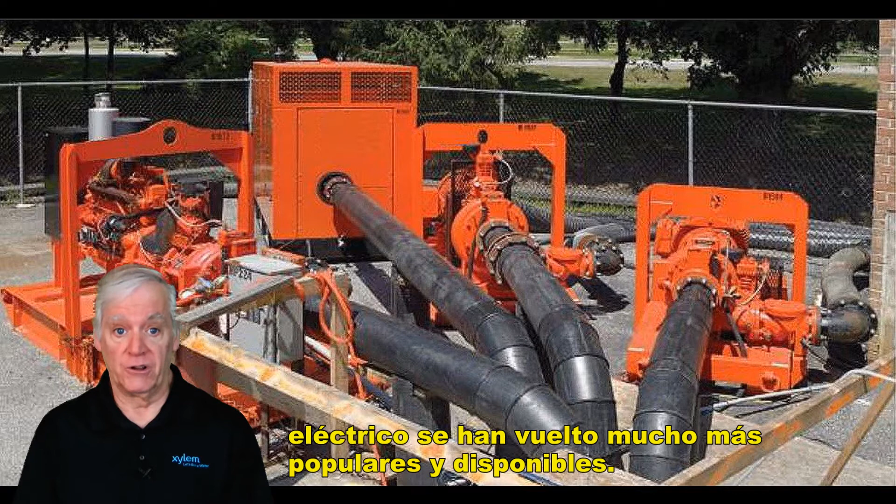So which is best, diesel or electric? Well, that's where operating costs come in. To compare operating costs, you first have to know the operating conditions, specifically the duty point of the application, or in other words, the required flow and head.

Here's an example. An 8-inch portable pump on a sewer bypass application will be operating at 1,500 gallons per minute and pumping against 70 feet of total dynamic head. On a performance curve, in this case the Godwin CD225M, that would mean an efficiency of about 61%.

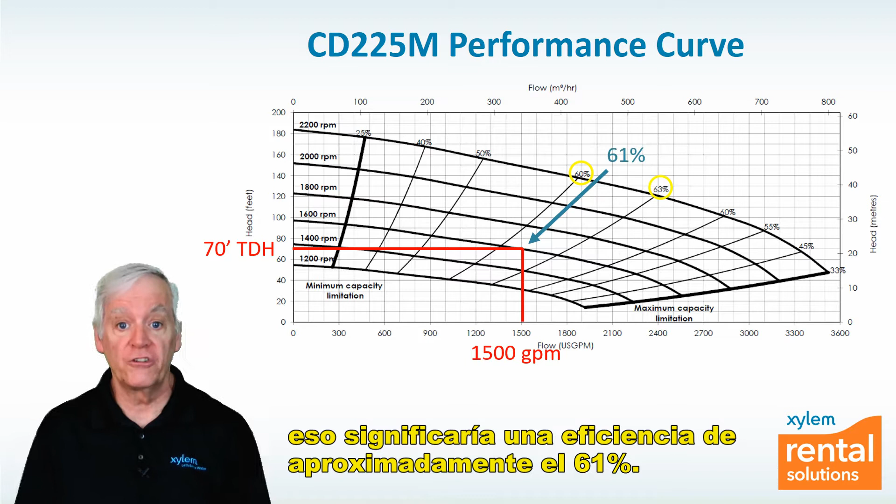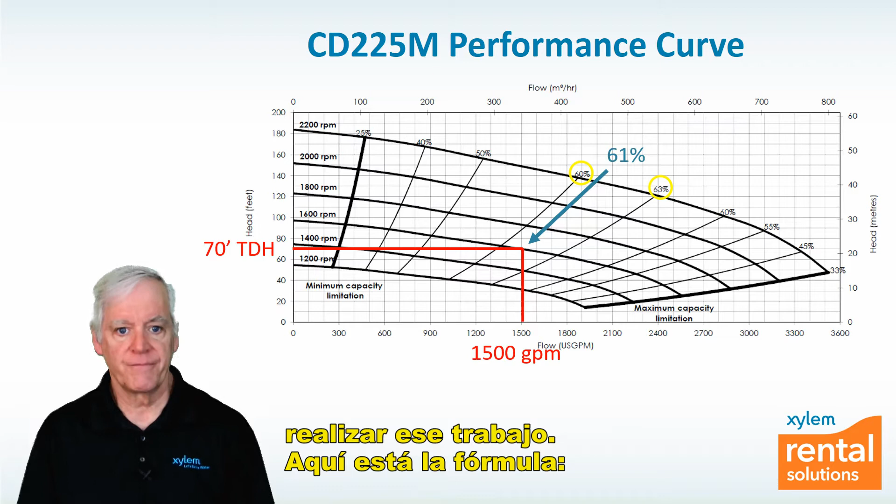With those three pieces of data, flow, head, and efficiency, you can calculate the horsepower needed by the pump to do that duty. Here's the formula: flow times head times specific gravity, which in this case is 1 because it's water, divided by the efficiency, and then divided by 3960, which is a constant conversion factor. In this example, the impeller would need approximately 43.5 horsepower of torque from the drive source.

Now let's convert that into operating costs. First, we'll start with the diesel. Taking 43.5 horsepower times 0.05, which is a conversion factor of horsepower to fuel consumption per hour, results in 2.2 gallons of diesel fuel per hour of operation.

Let's be conservative and say that diesel fuel runs about $3.50 a gallon. Multiply 2.2 gallons per hour times $3.50 per gallon, and you get $7.70 of operating costs per hour for the diesel model. And that doesn't include service costs every 250 hours of runtime.

Now let's look at the electric drive. First, we'll estimate that electrical power costs about 10 cents per kilowatt hour, a pretty good national average. We'll start by multiplying 43.5 horsepower times 0.746 to convert to equivalent kilowatts. Then multiplying the kW by 0.10, or 10 cents per kilowatt hour, equals an hourly operating rate of $3.25, which is just a little less than half the cost of the diesel.

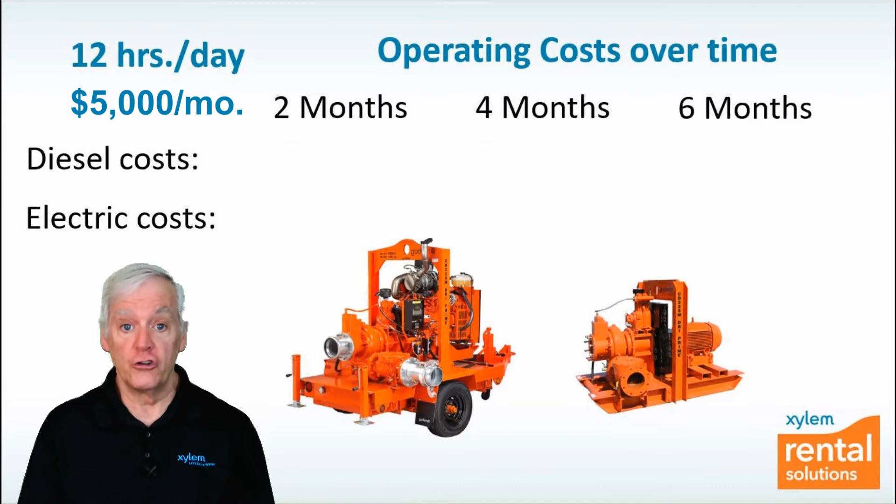So, back to our example. Let's say the pump will run 12 hours a day on average, and the cost of getting electricity to the pump, or drop cost, will be $5,000. We'll compare operating costs at the 2-month, 4-month, and 6-month duration.

As we can see here, at the 2-month duration, the operating costs of diesel are less expensive, even if servicing costs are added in. At 4 months, it's a toss-up, again when factoring in the additional cost for diesel engine servicing. However, if the application is on site and running for 6 months, diesel fuel costs start to outweigh the initial drop costs of the electrical power source by a pretty good margin.

In sewer bypass pumping system designs, actually a blend of the two types of drives is used quite often, with an electric drive model as the primary pump because it will run most of the time, and a diesel-powered pump serving as a dedicated spare, providing the needed redundancy for sewage pumping.

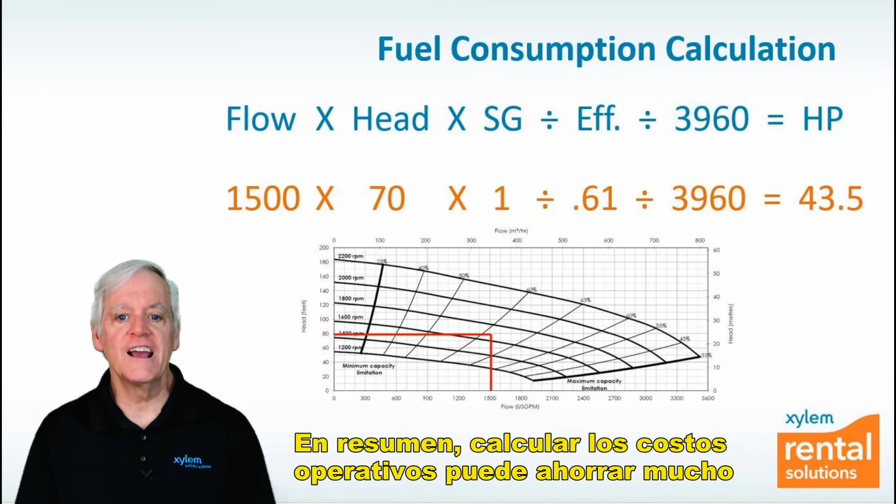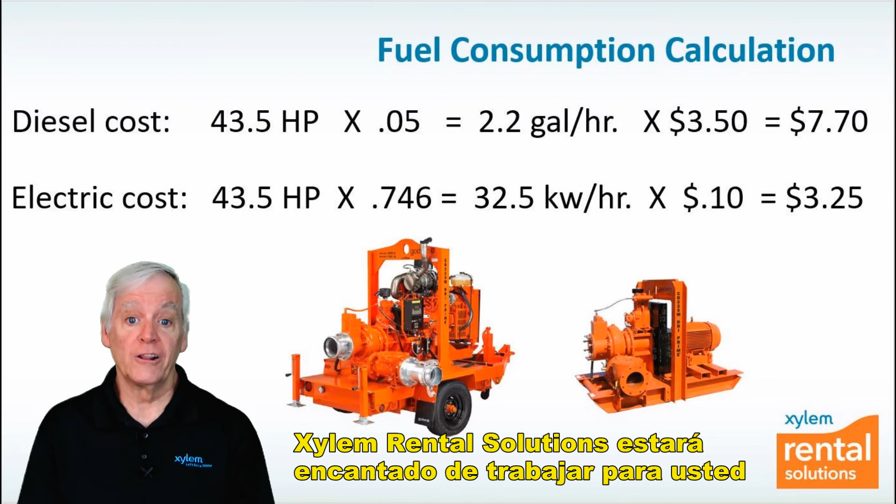To sum up, calculating operating costs can save a lot of money, but doing all those calculations is not something that customers who rent pumps often do. However, it is something that your local Xylem Rental Solutions pump expert would be happy to work up for you so that you can get the best bang for your buck on your next pump rental.